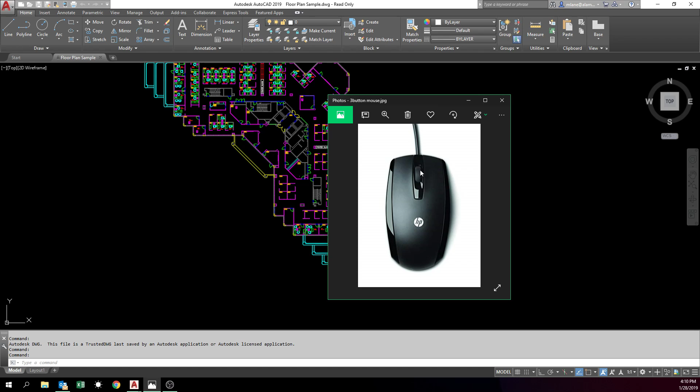With your mouse, it's helpful to have a 3-button mouse—not an absolute necessity, but it makes life much easier. This middle button is real useful. If we hold it down and move back and forth, that's called a pan. If we scroll it back and forth, we're doing a zoom—you're probably used to this from other software.

We can actually do that from the command line down here. If we type Z for zoom—the full command is zoom—we can do the same thing and zoom in. The nice thing about zoom as a command is we have these options: all, center, dynamic, extents, previous, scale, window, or object.

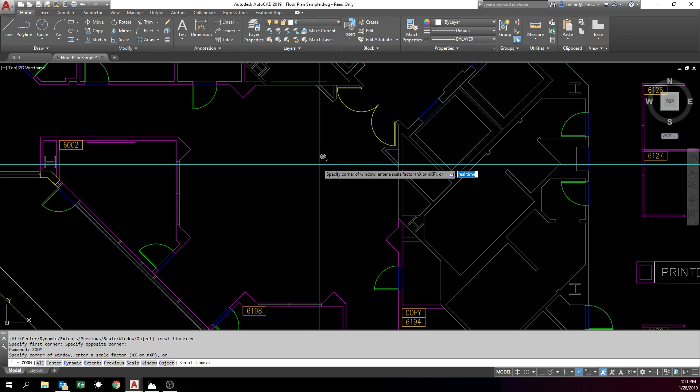If we hit W for window—notice it's always the blue letter, so W—we can put a window around what we want to zoom to. If I do zoom and P for previous, it takes me back to where I just was.

If I hit zoom and extents, it takes all the drawing stuff and fits it in the middle of our screen as much as possible. All is pretty much similar to that—there's a little bit of a difference, we'll discuss why later. Center centers the drawing, and scale lets you give it a scale factor. But for the most part, those are the kinds of things that it does.

Now you'll notice that when you start typing zoom, it shows all the other commands that start with Z. Z itself, if I just hit enter now, will start the zoom command. That's called a command alias—most people call them shortcuts. We're going to learn how to make our own command aliases later.

Remember the whole command being zoom, Z-O-O-M. This will become important later. We're going to learn to make icons, but to do that you have to know the real full command, not just the command alias or the shortcut. We can make icons that do more than just one command. We can make them do quite a bit, so they can be very useful.

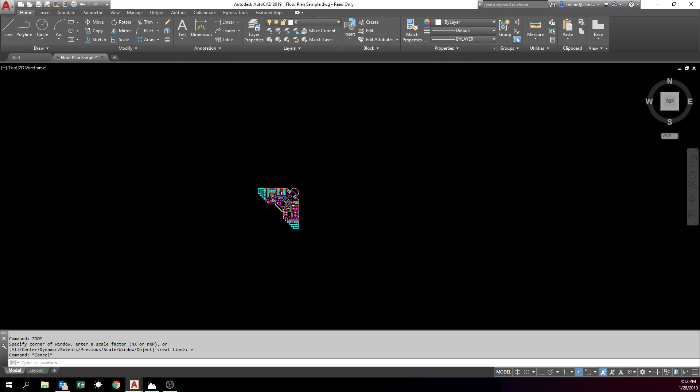There are icons for zoom and pan up here too, but like I said, you're probably always going to just be using the scroll button and holding the middle button down to pan. Zoom previous is useful, I use that one a lot. Zoom extents can be useful as well. But that's about it for just looking at a file.

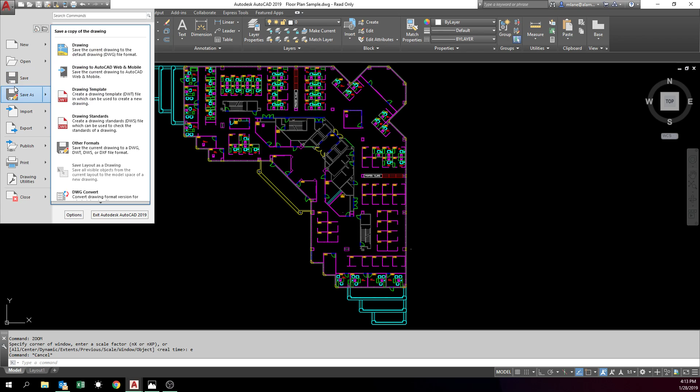Let's now go make one. So we need to go close this. We go up to the A. And we don't need to save it because this one is going to give us trouble anyway. But we'll just come down here to close. It's still going to prompt us, but tell it no.

Now we'll go back up to the A and we'll go new. And that brings up the template dialog box. Templates are basically an AutoCAD drawing that's got the settings you want in it already. ACAD DWT is the default one. Later we're going to modify that as we learn different things, and we'll put them in there so they're always handy and ready for us to use. So by the end of the class, we'll have a pretty useful template file.

If you go between locations, this might be a file you want to back up and take with you. A lot of times different IT people will not let you write over it each time. Well, each time you load AutoCAD, it's going to load it up as a blank file, so you won't get to keep all that stuff. Depends on how your IT department is. The nice thing about AutoCAD is if you don't use the template, you can always open an existing drawing, immediately do a save as, and you're good to go too.

But anyway, we'll use acad.dwt and hit open. And we get a brand new blank drawing.

Yay! First thing, let's go call it File, and we'll do Save As, and we're going to put it someplace. Your directory is going to be different than mine. I'm going to put mine in my Documents directory under my name. Your instructor will tell you where to put it. I've got a temp directory. We'll put it here. I'm going to call it Assignment 1.

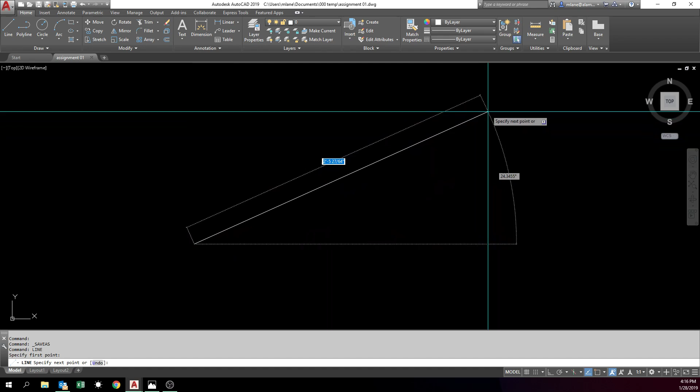The shortcut for line is L, but if we knew, let's say, how far over we want to go, we could either watch that little thing scrolling along with 64ths and 32nds, or we could just say I want to go 24 inches in that direction, hit enter, and it's gone 24 inches.

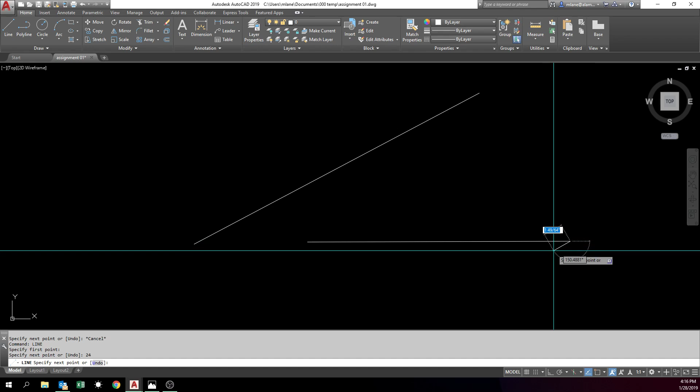Now that line may look like it's flat, but if we zoom in really close, you'll find it's not. To get a truly flat or up and down line, you have to turn on what's called ortho, because AutoCAD will let you draw in any direction, or it can limit you to the 0, 90, 180, and 270 axis. The way to turn ortho on is the F8 key at the top of your keyboard. If you hit F8, you'll notice now you're limited to just those directions.

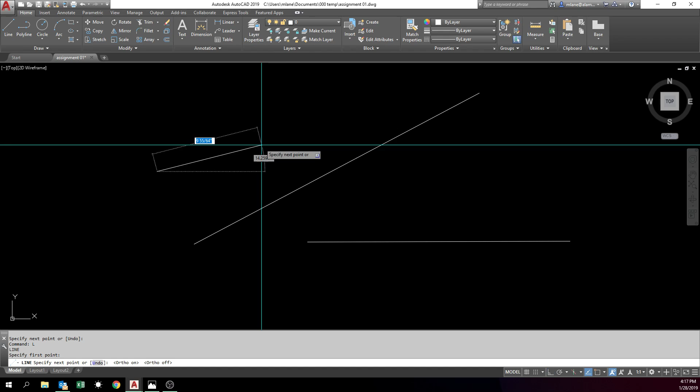Another thing you'll notice, I'm going to turn ortho back off now, is when you come on over another object, like one of these lines, little green boxes show up at the ends. Those are called object snaps, or OSnap for short. This is another one of the function keys you can turn on and off.

Let's say I really wanted to draw to this point on the line. If I click there right now, look what happens. Normally that wouldn't have happened. Let's try it again. Normally it goes to the end point of the line anyway, like that.

It's like taking your car to the mechanic. It never makes a sound.

So we go to line. If we wanted to put it to this point, we can hit the F3 function button up at the top of the keyboard, and that turns OSnap off. You'll notice it tells you down here at the bottom, OSnap off. And if I hit F8, it tells me ortho on. These toggle on and off.

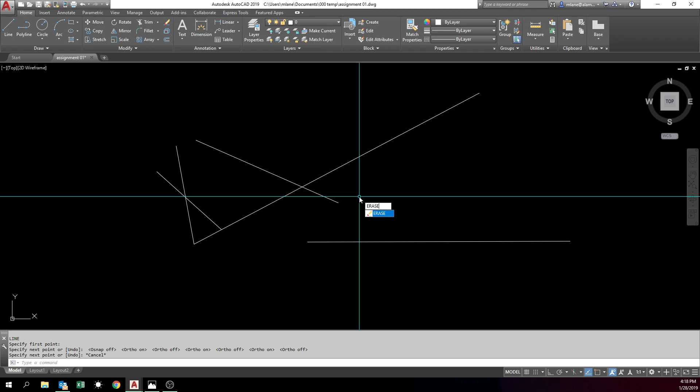So it's fairly simple to use. Let's go, oh, I didn't mean to draw all these, let's get rid of them. Erase is the command, E is the shortcut.

When you go to erase something, you can pick things one at a time. The other option, if you don't pick on an object, it'll give you two different type windows depending if you go to the right or to the left. To the right is what's called a selection window. It'll only pick the things that are completely inside of it.

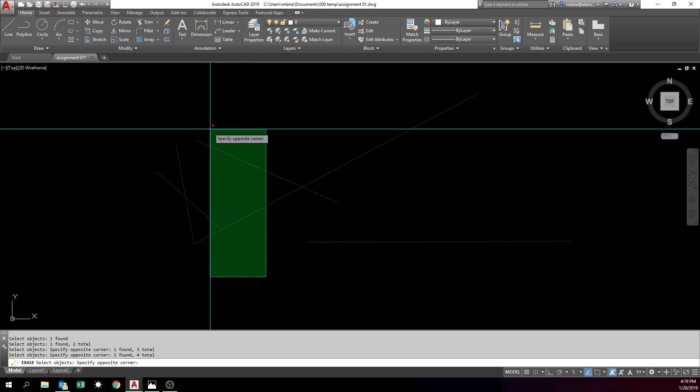Here's an example. Watch, we'll use the selection window to pick just that one line. The other is what's called a crossing window. If we go from right to left, any object that is enclosed or crossed by a crossing window will be selected. So now when I hit enter, all those items will disappear. That's the difference between a selection window and a crossing window.

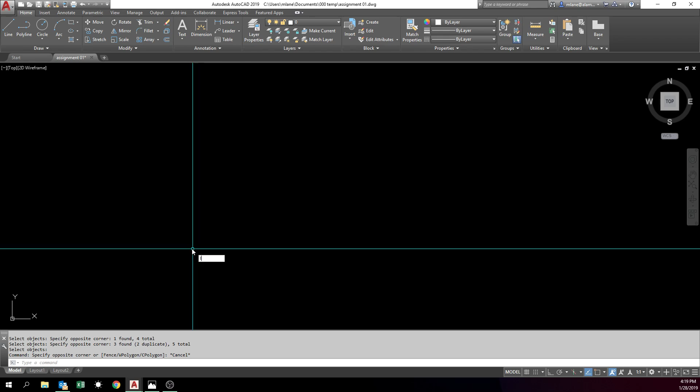But let's say we want to draw a line that goes from here, over 3 feet and up 2 feet. Well, I suppose I could turn my ortho on and go 3 feet, and the apostrophe is the foot mark. I don't have to put the inches. And now I can go up 2 feet.

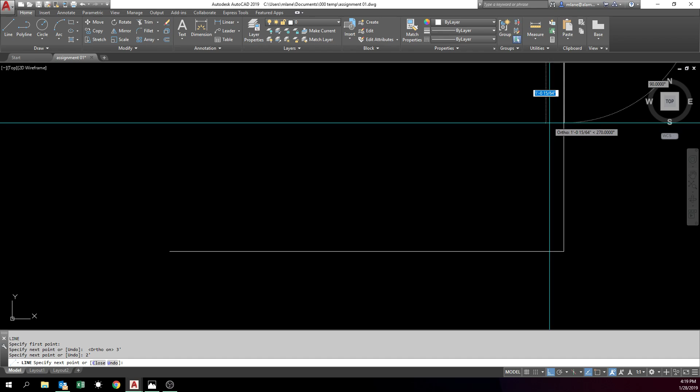Oops, I can't see where I am, so I'll use my middle button to scroll back some, and I can pan to the middle. Now I can actually draw the line I wanted in the first place. Oops, my OSnap's not on, I'll have to use my F3 button to turn it on. And now I can erase those two lines.

Well, that was a pain in the bottom. Let's get rid of that. Instead, let's do it this way. Line, if we hit 3 feet, comma 2 feet, or we could even put 24 inches here. Notice that it does it for you.

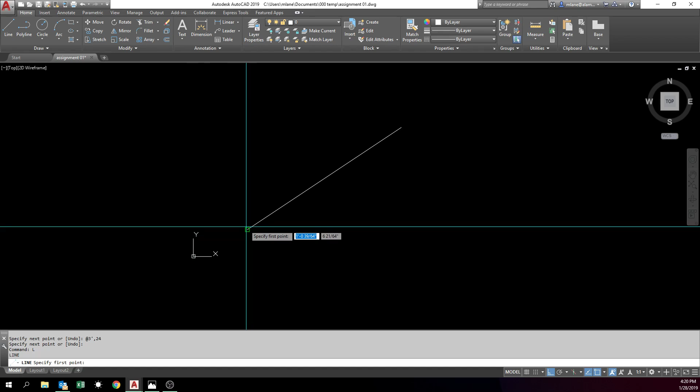AutoCAD uses Cartesian coordinates. It uses an x-axis, which is the first number, and a y-axis. If I had done the same thing and gone 2 feet, comma 3 feet, I would have got a different line because that's 2 feet over and 3 feet up. The first number is always the sideways direction. We'll talk about that more later.

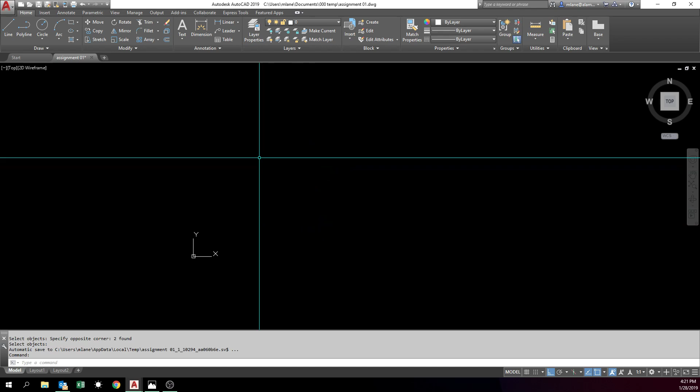In previous versions of AutoCAD, 4 or 5 versions before, you had to type an @ sign in order to do this. Otherwise, it would snap to an actual coordinate location based off of 0,0 in your space. That's not the case anymore. It's a little bit easier now. So that's the good thing.

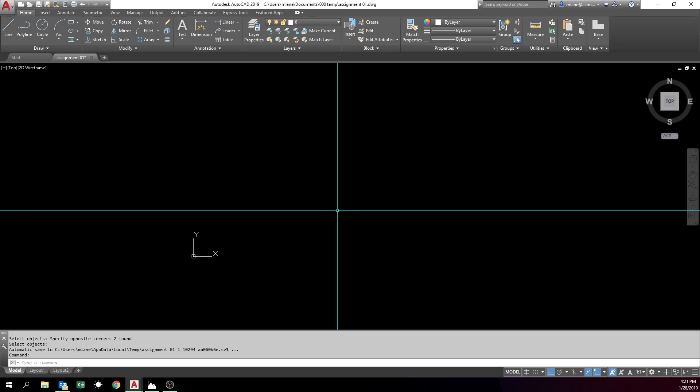For the rest of this lecture, start playing with some of these other things. Some of them are fairly simple. Circle, you pick a middle, pick out where you want it to be. You can also pick a middle and tell it like 24, and now I have a circle with a 24-inch radius. We've got arcs, ellipses, a whole bunch of other stuff.